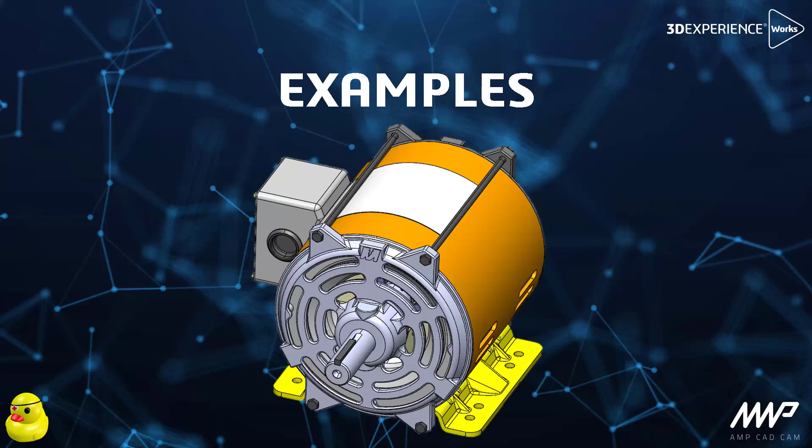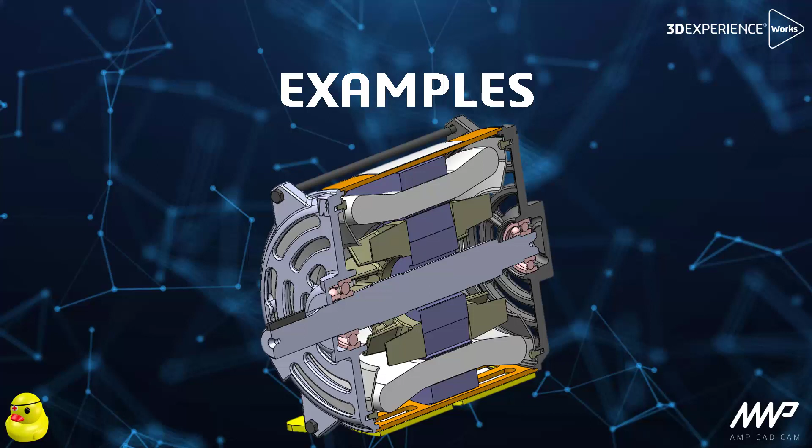Electric motors are line replaceable units. That means they get swapped out in their entirety with a new or refurbished one as a maintenance procedure. Unless you're making or modifying the off-the-shelf item, you really don't need all this detail. Okay, this just makes me angry. Is there some unspoken challenge out there for how much time can be wasted creating useless models or something?

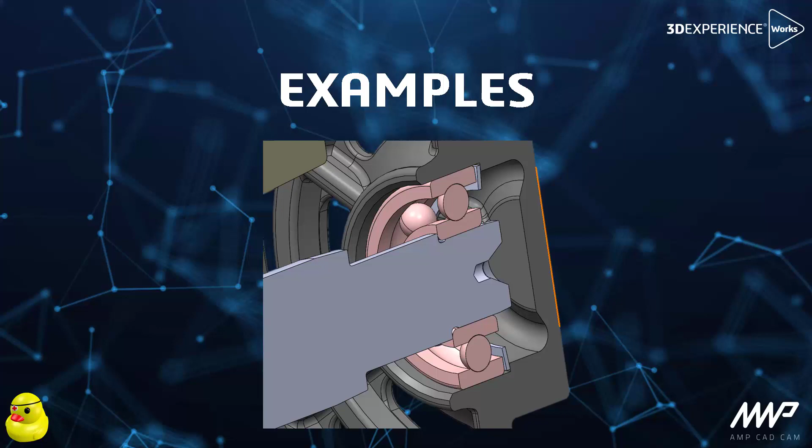If you're a drawing office manager or a design engineer team leader, you need to be on the lookout for models like this, especially from those contract guys and girls who get paid by the hour. This is what you're paying them for, modeling a fucking ball bearing.

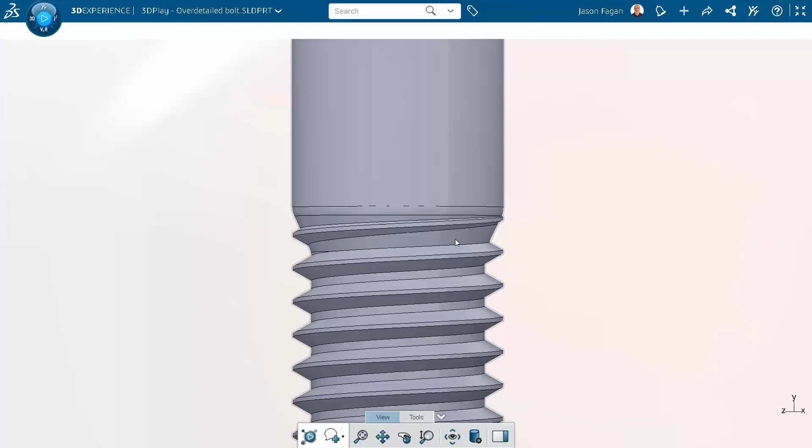Here's another example. This is a real piece of work. It's a flanged bolt, and they've gone and cut a helical thread. There's even thread run out there. That must have taken a bit of time to do and is totally unnecessary unless you are actually cutting this bolt yourself. There's the serrated cuts for the underside of the flange on the head.

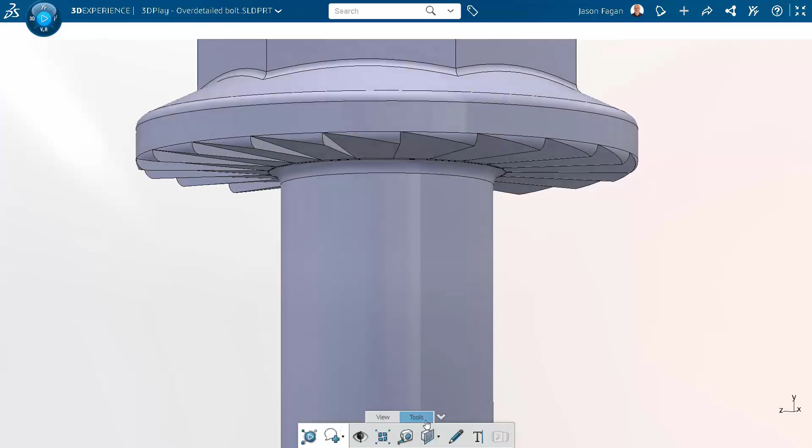Again, why is this necessary? It's totally unnecessary. This is an off-the-shelf item. Why would we need to model that? What possible benefit is this going to bring? Let's do a quick measurement here. So that's roughly 0.343 millimeters in that edge size.

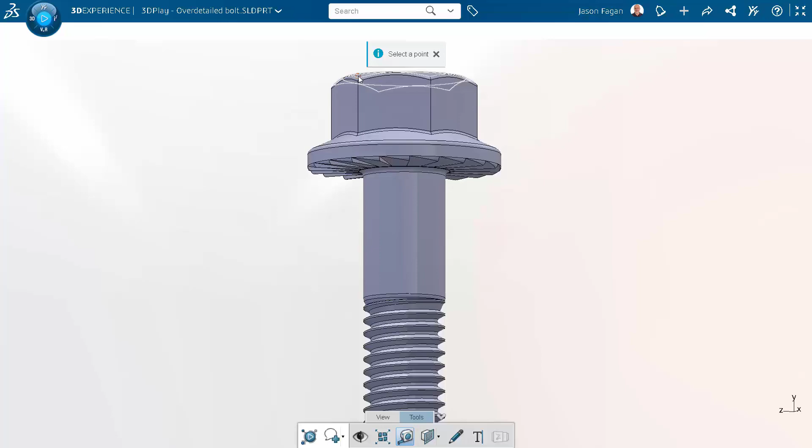We do a rough measurement on this total size of the bolt itself. We see that it is roughly 31 millimeters overall. Doing a quick calculation, 0.343 over 31 is 1% of the total length of the bolt.

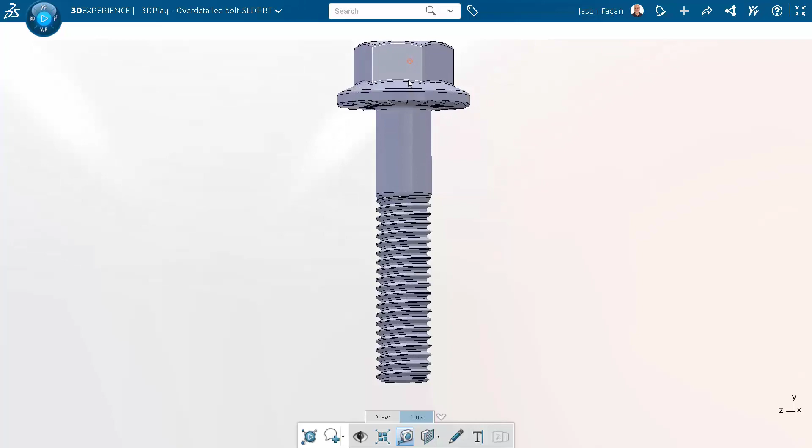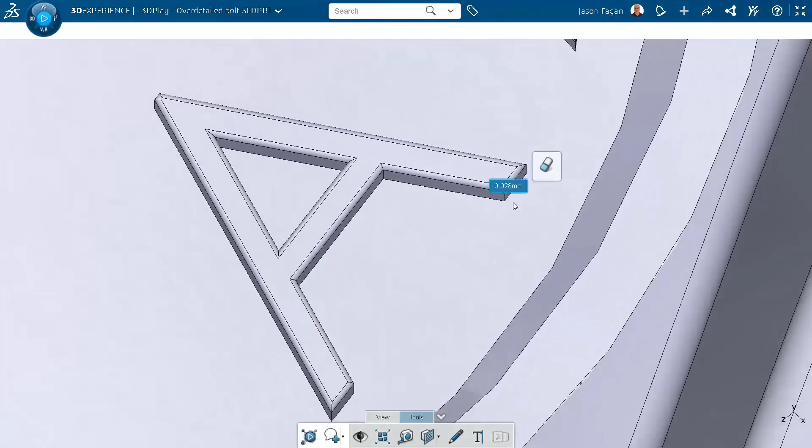That's not really great. And then they did this by putting the text on top of the bolt. We just choose one of these edges here just for example. Let's take that rounded edge, that filleted edge over there. That's 0.028, and 0.028 over the 31 is 0.09% of the total size of the bolt.

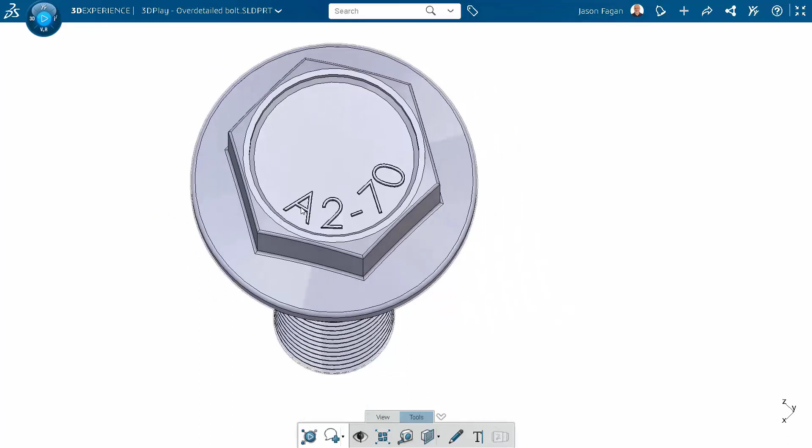And these kind of extreme ratios of smallest edge to model size is not really great for the graphics processor, people. Okay, it's not going to give you good results. What are the effects of modeling off-the-shelf items? Well, wasted time for one. It adds absolutely no value to have all those threads on the bolt.

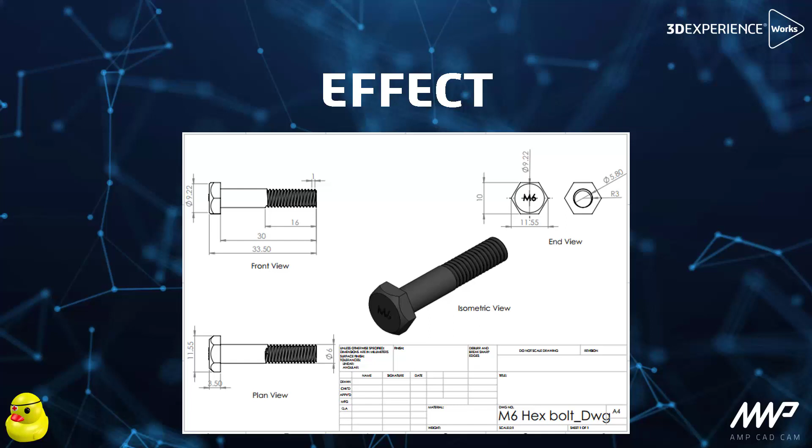Another effect is poor PC performance, because now there's a whole lot of extra model features that the PC needs to calculate, and every time you spin the model, the graphics card gets to recalculate every single frame. Shitty non-compliant drawings. Threads are not meant to be shown on drawings. It's against the drawing standards. Look at all those lines on top of each other. This is a mess and a waste of printer toner. Think about the planet, people.

Another effect is incorrect BOM. Layers of sub-assembly items because you insisted on modeling the off-the-shelf item full-featured. Now you got yourself a BOM table that needs editing and force-fitting to make it show up right on the drawings. Another effect is incorrect mass calculations.

So you modeled everything. Well done. Chances are you didn't assign the correct material properties. In some cases, you won't even know the exact material that was used. Why are you going down this road? So it's easy. Just simplify.

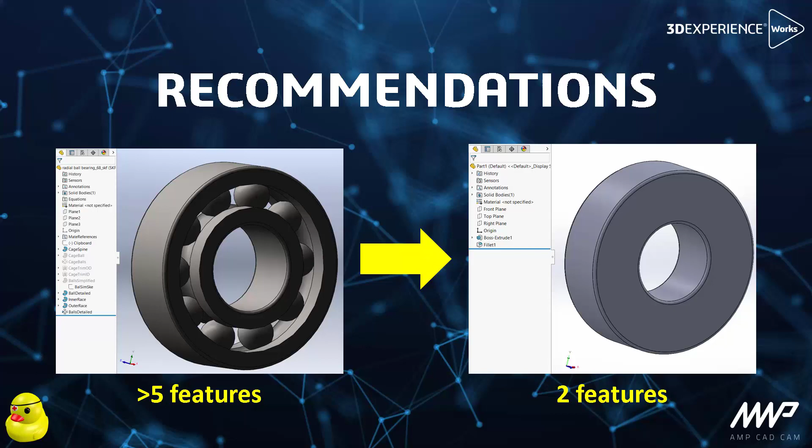Commercial off-the-shelf items should not be modifiable because they are off the shelf. Make them single part files, even use a STEP file if you want. Modify the mass properties for the correct weight and then leave it. Remember, every single extra feature in every single extra unnecessary part has to be regenerated by your PC. It's all fun and games until you have hundreds or thousands of these things in your assembly. Then it adds up real quick.

So stop ducking around and wasting time and money on irrelevant things. Set up a library and make it read-only, then make everyone use that. Just download the models from the suppliers and simplify them by eliminating the unnecessary details, and then turn them into library read-only components never to be modified again. Just keep it simple. There's one golden rule. If you aren't manufacturing it, you shouldn't be detailing it because it's irrelevant.